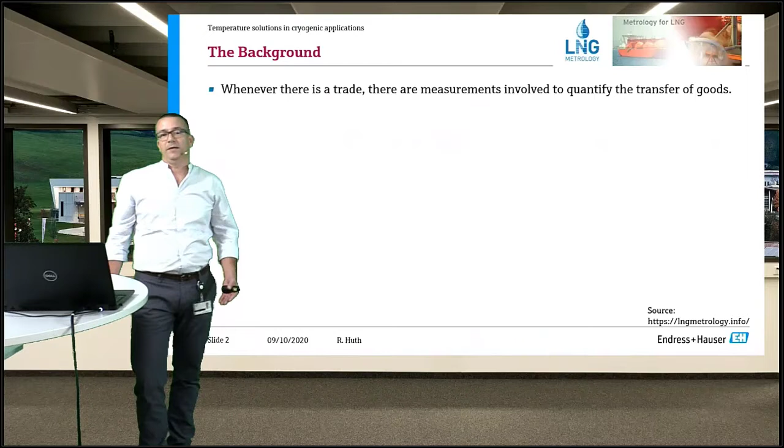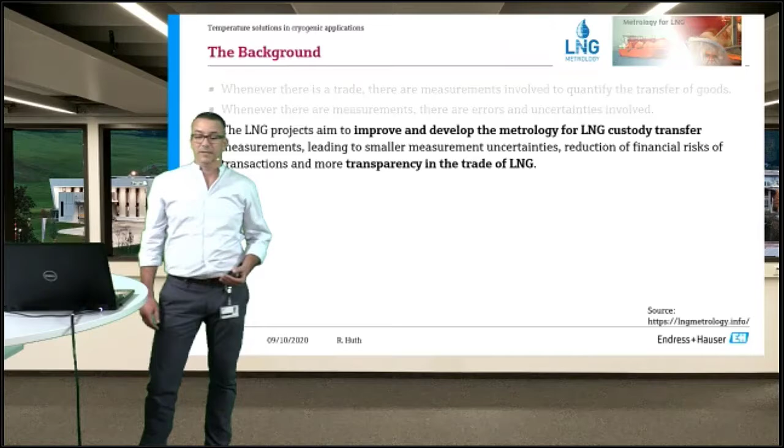Okay, so let's start. Some points about the background. So, whenever there's trade, of course, there's measurement involved to quantify the goods that are transferred. And whenever there's measurement, of course, there are also errors and uncertainties behind that. So there's a LNG projects group that tries to improve and develop metrology for LNG with the aim to reduce the measurement uncertainties and the reduction of financial risks. In the end, make trade of LNG more transparent.

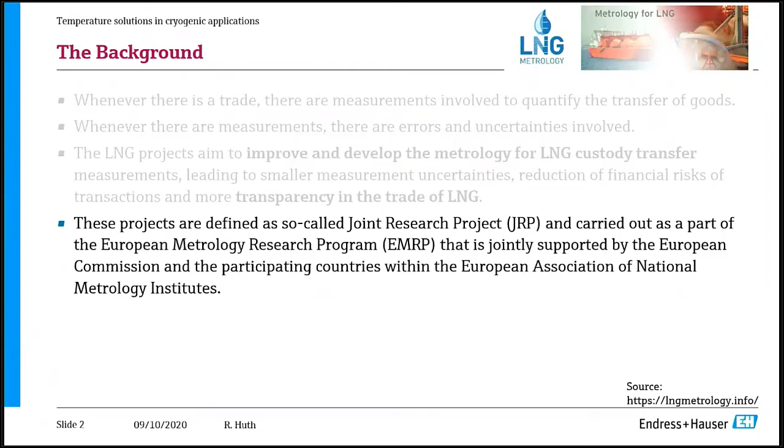These projects are a joint research group carried out as part of the European Metrology Research Program, and it's supported by the European Union and also by the countries and the European Association of National Metrology Institutes.

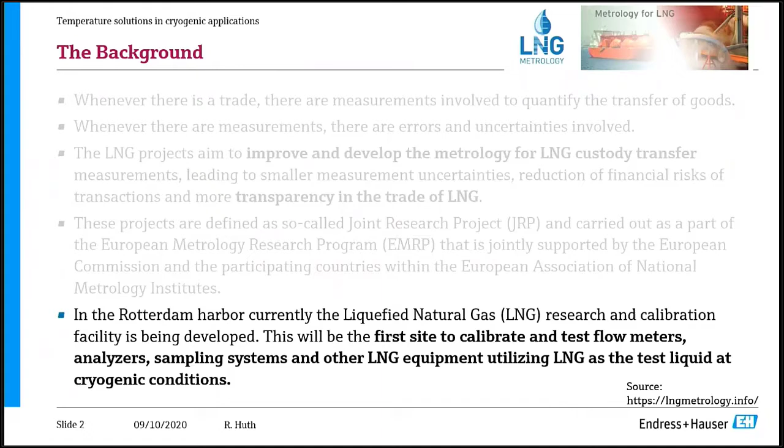Under the frame of these projects in Rotterdam harbor, there has been built a liquefied natural gas research and calibration facility. This is the first site that will be able to calibrate and test flow meters, analyzers, sampling systems, and other LNG equipment utilizing LNG as the liquid during the test. So quite a good and important project.

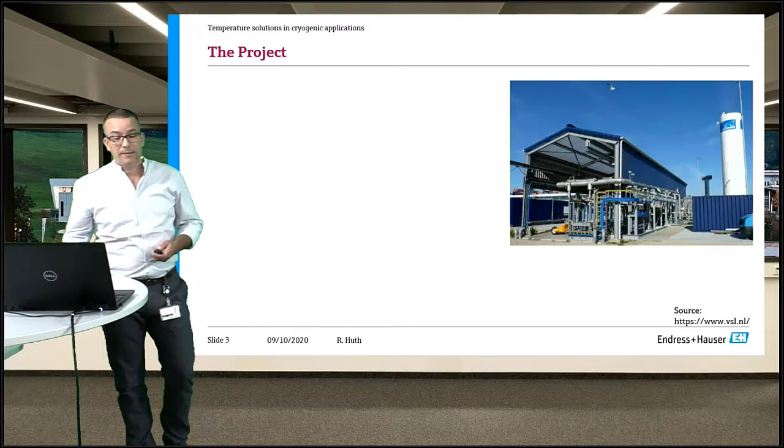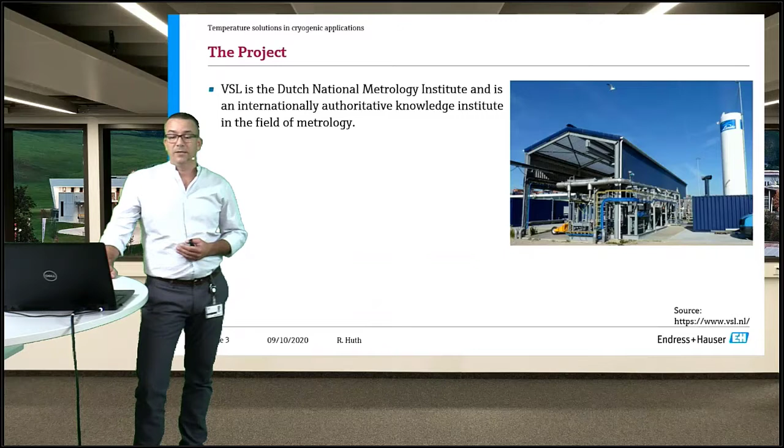So if we are now talking about this project, this calibration facility has been built by VSL. It's the Dutch National Metrology Institute and an internationally known knowledge institute in the field of metrology. The institute has built the most accurate calibration plant for flow meters operating in LNG in the world.

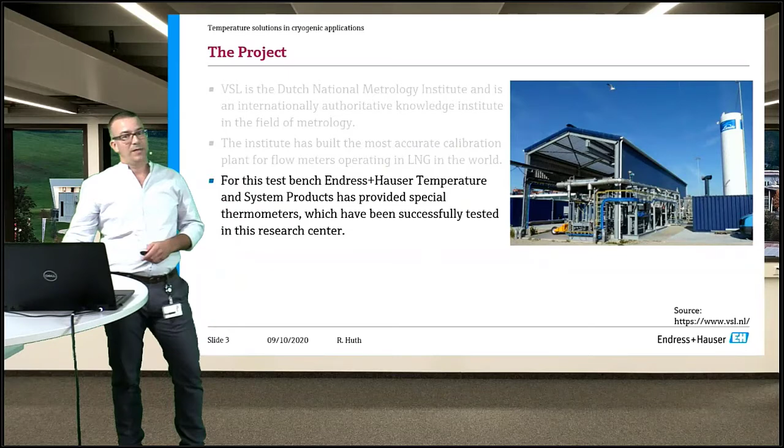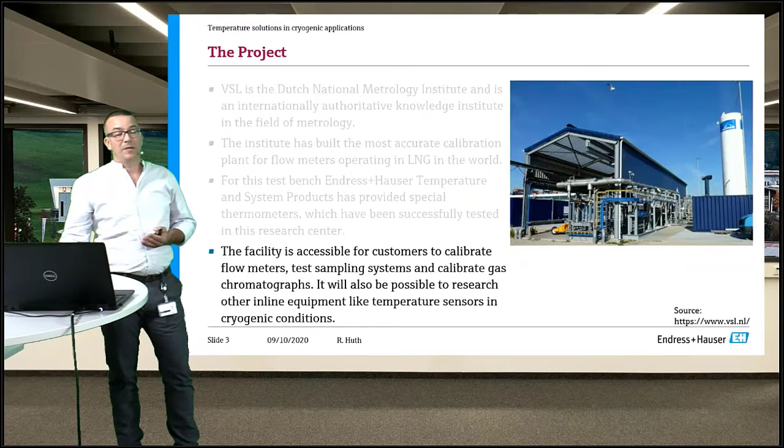And Endress+Hauser has gotten the possibility to install our temperature sensors there. These temperature sensors have been developed together with VSL, especially for this project, for this application, and have also been qualified and tested inside of this plant. This facility will be accessible for customers to calibrate flow meters, test sampling systems, and calibrate gas chromatographs. Also, temperature sensors might be calibrated and tested in there.

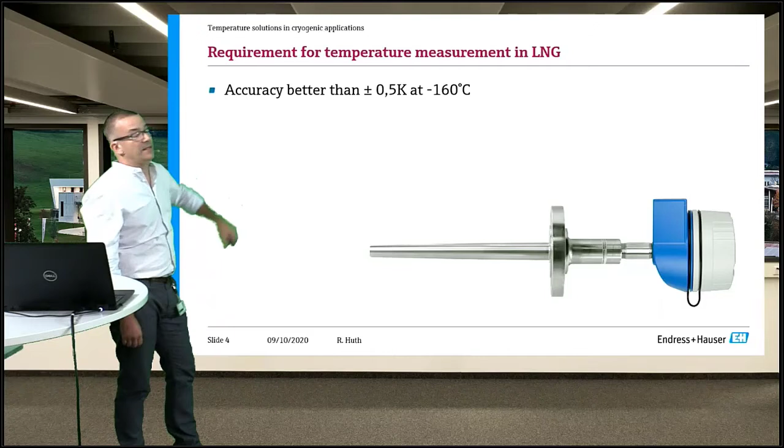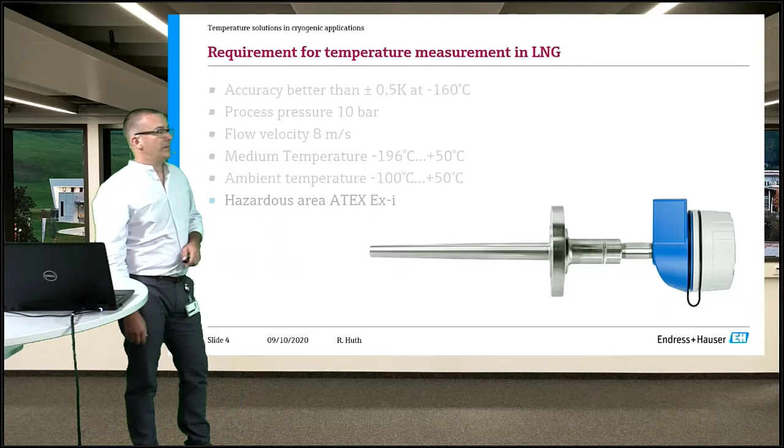So what are the requirements for temperature measurement in LNG? Accuracy better than plus minus 0.5 Kelvin at minus 160 degrees. Process pressure 10 bar, a fluid velocity of 8 meters per second, medium temperature minus 196 because the complete plant was qualified and also calibrated with liquid nitrogen. And the ambient temperature minus 100 up to 50 degrees, and the complete assembly is in an ATEX Ex area.

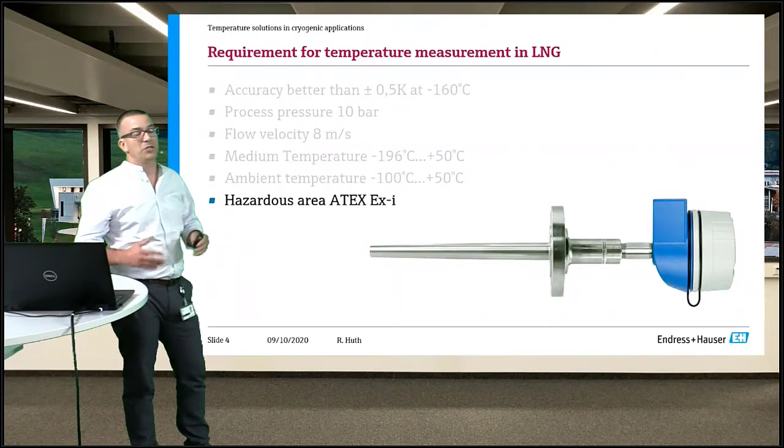So from the beginning, that doesn't look too critical for temperature measurement. But what do you think? What are the major difficulties for temperature measurement in LNG applications? So please use Menti, type in some words. What do you think are the major difficulties for temperature measurement in LNG? Any idea?

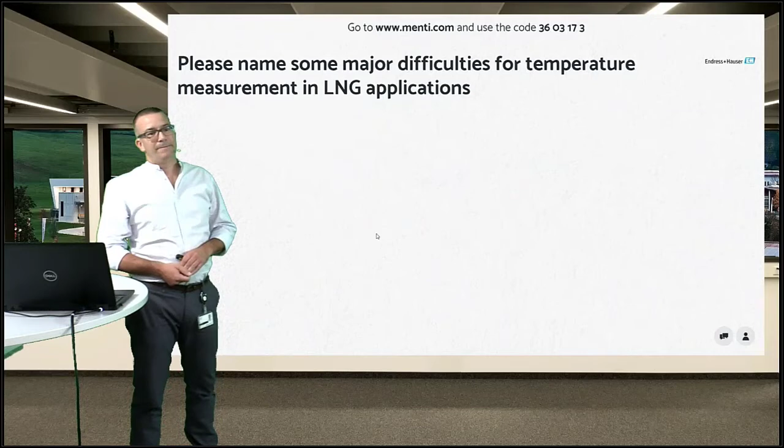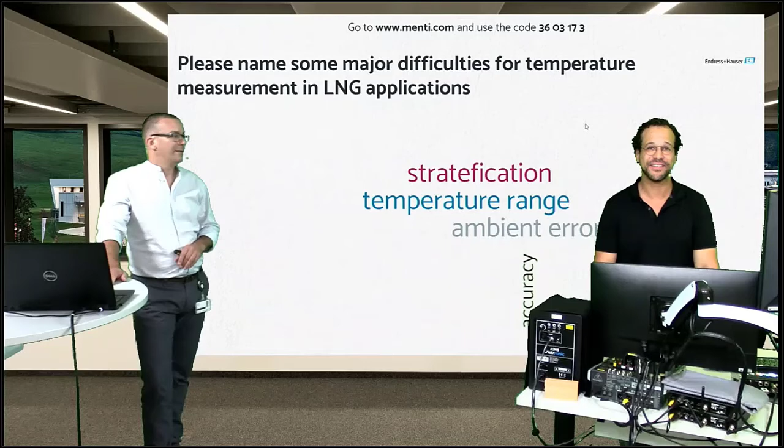We need you again. No time to watch YouTube videos. Right here is the place to be. And we get the first result. So Robert, you can quite directly tell us something about what you think about it.

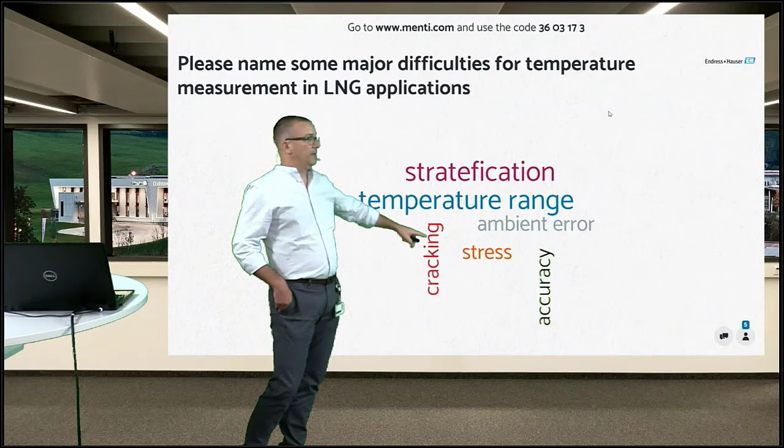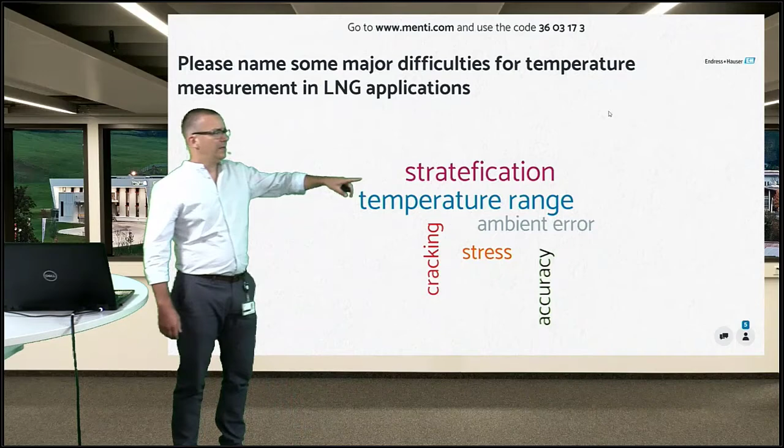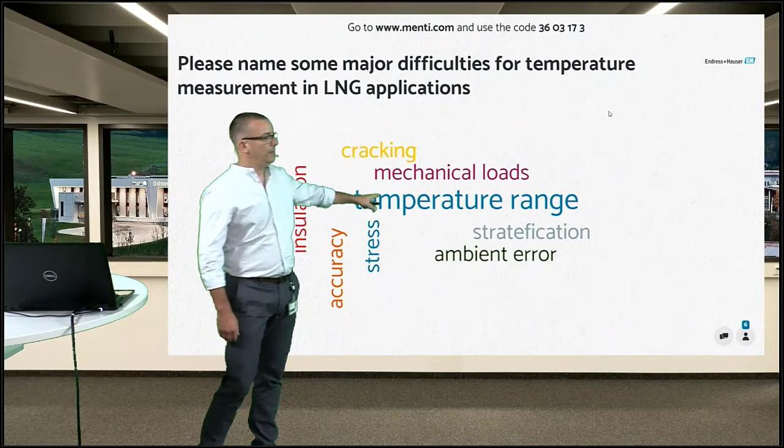Yeah, okay. We see accuracy here. Yes, definitely. We'll come to that point later. Ambient error as well. Temperature range. Yes, of course. Stress, I think it's thermal and it's mechanical stress. Absolutely true. Cracking. I'm not sure if that's the mechanical stress. Not sure about that. Stratification. I don't know what that means, I'm sorry. Mechanical loads, yes. Insulation, absolutely. Okay, then I think we have all that. Most of them are right. Absolutely. So let's have a deeper look at the requirements.

So we said accuracy better than plus minus 0.5 Kelvin. What do we have to think about? At the first step, it's the accuracy of the sensor element itself. Then it should be an exchangeable sensor for recalibration to see if it's still okay. If we want to have a high accuracy, of course, we should think about digital communication. And for this high accuracy, we should also think about sensor transmitter matching, so modifying the transmitter in a way that the optimum result comes out of the sensor.

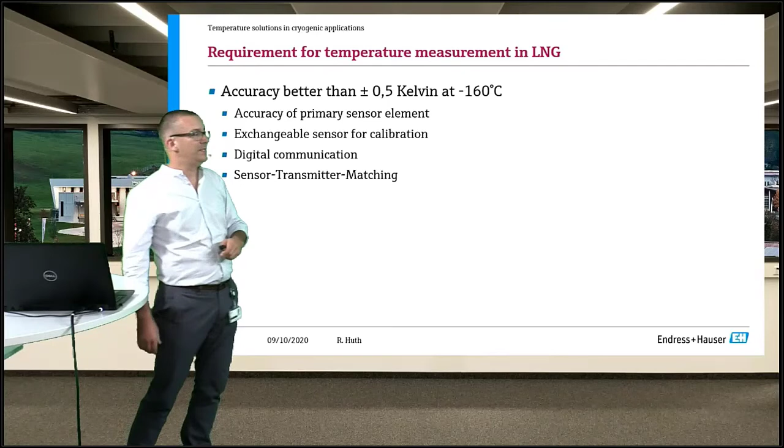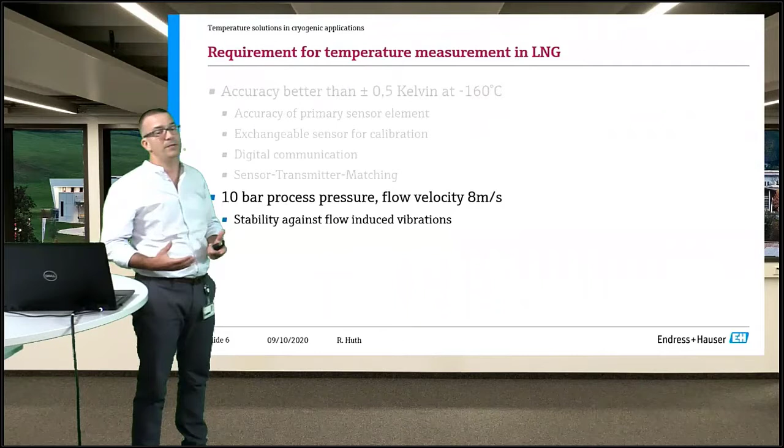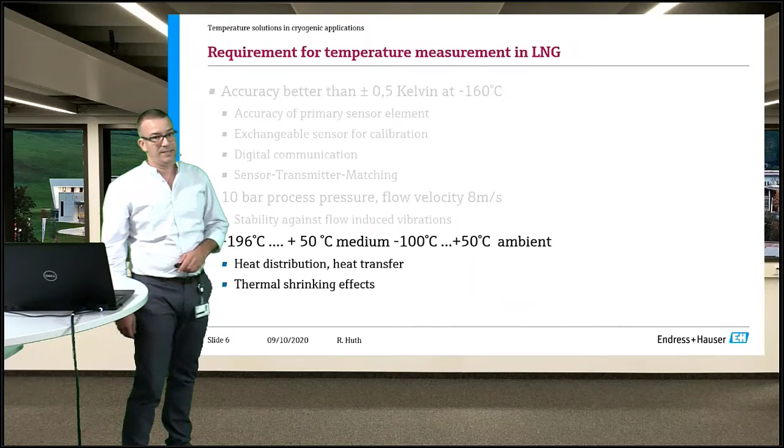10 bar process pressure and a flow velocity of 8 meters per second. Of course, for these conditions, we have to think about the stability against flow-induced vibrations. And with a temperature range from minus 196 to plus 50 in the ambient, of course, we also have to think about heat distribution, heat transfer, and also thermal shrinking effects. So how do we do that? With these points, we started the development together with the colleagues in VSL.

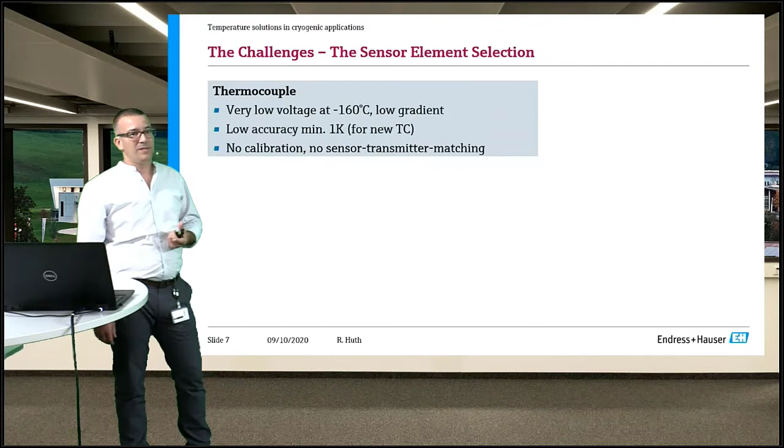If you think about the sensor element, so the selection of the primary sensor, we could think about a thermocouple, but at minus 160 degrees, they have a very low voltage and a low gradient, so it's hard to measure or to transfer the right temperature. Then thermocouples have a low accuracy, minimum plus minus 1 Kelvin, and that's only valid for new thermocouples. And also a bad effect: with thermocouples, you are not really able to calibrate them and to check if they are okay or not. So that doesn't work. And sensor transmitter matching is also not possible with thermocouples. Then if you think about the standard RTDs according to the IEC, for this temperature range at minus 160 degrees, only class B is available.

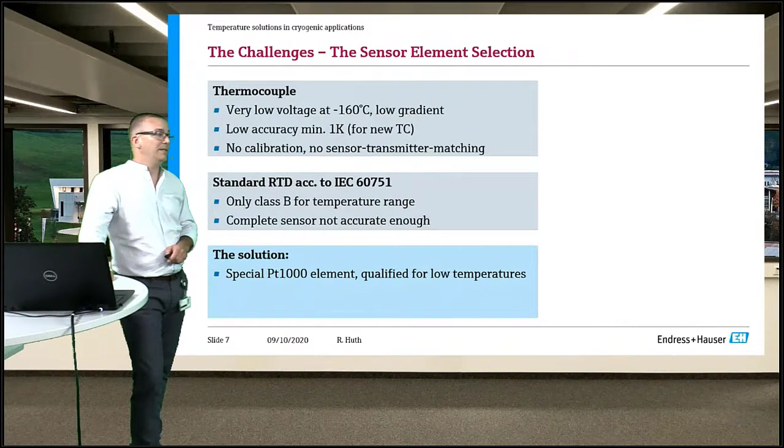Class B in this temperature range means an accuracy of plus minus 1.1 Kelvin. And if we also think about the ambient temperature and the heat transfer, the complete sensor would not be accurate enough. So our solution was a special PT1000 element. It was qualified for the low temperatures.

We have special thermal characteristics of this sensor, and we had to put this special characteristic into one of our transmitters. The TMT162 is able to work with individual characteristics of the sensors, and with this solution we were able to achieve the highest accuracy for the minus 160 degree.

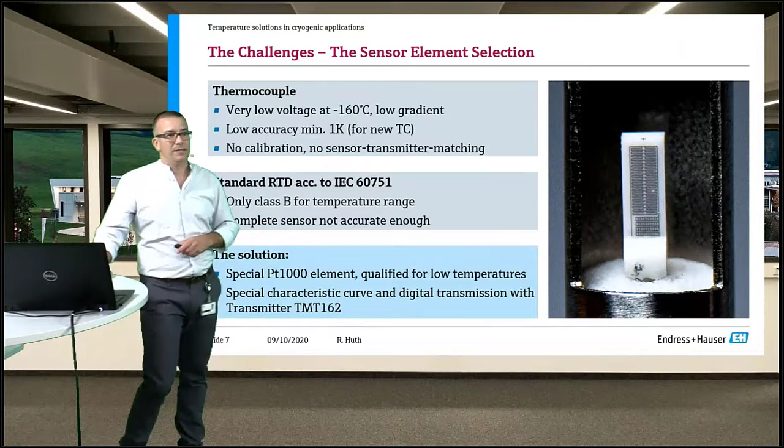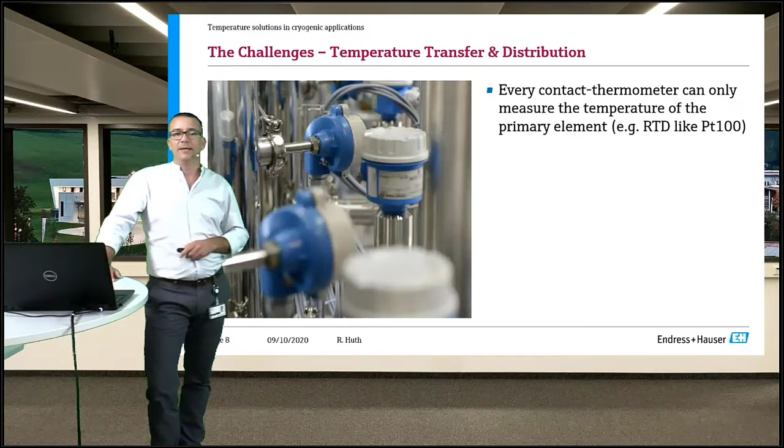Well, the second challenge is the temperature transfer and distribution. So every contact thermometer is only able to measure its own temperature, so the temperature of the sensor element, like the PT100 or here the PT1000. So knowing this, we have to develop a thermometer that is able to transfer the heat from the process medium through the thermowell to this sensor element. Of course, if the temperature sensor is able to transfer heat, it's also influenced by the ambient temperatures.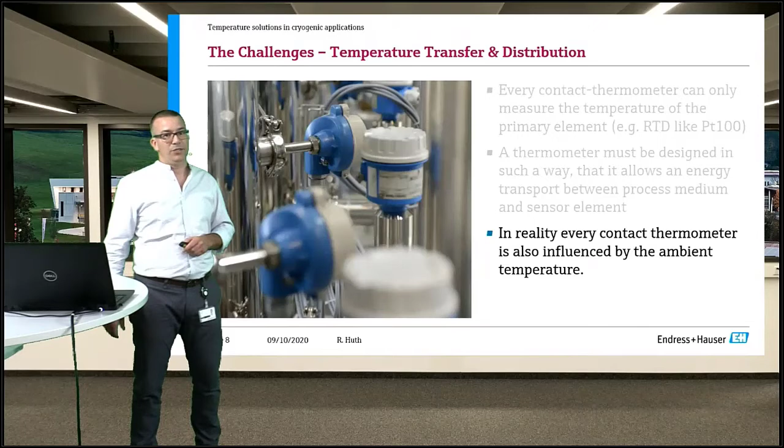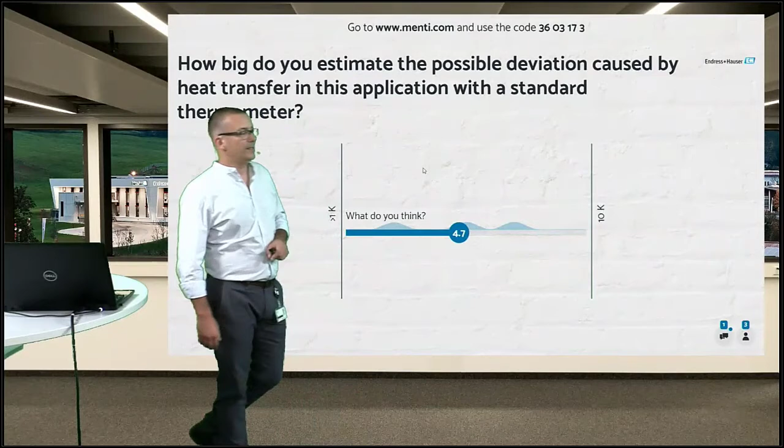So with the standard sensor, like we saw it some pictures ago, what do you think? Which is the estimated or possible deviation caused by heat transfer in this temperature range? So between minus 160 and 20 degree ambient temperature, what do you think is the failure that we get purely by heat transfer in this temperature sensor? You have here a range, from about 1K up to 10K. So what do you think is the failure that we get in there?

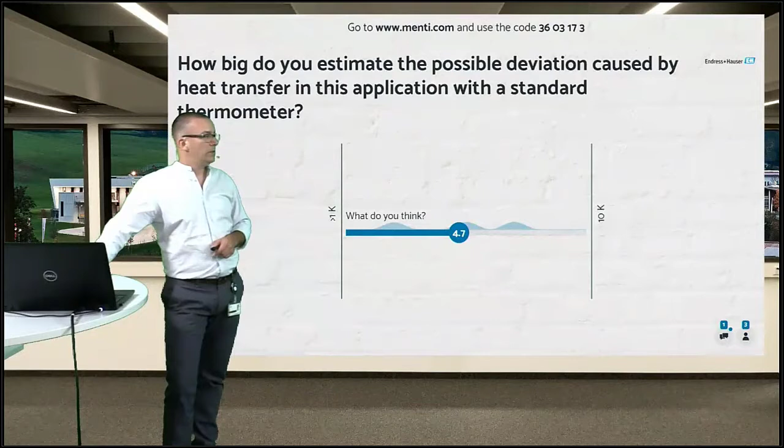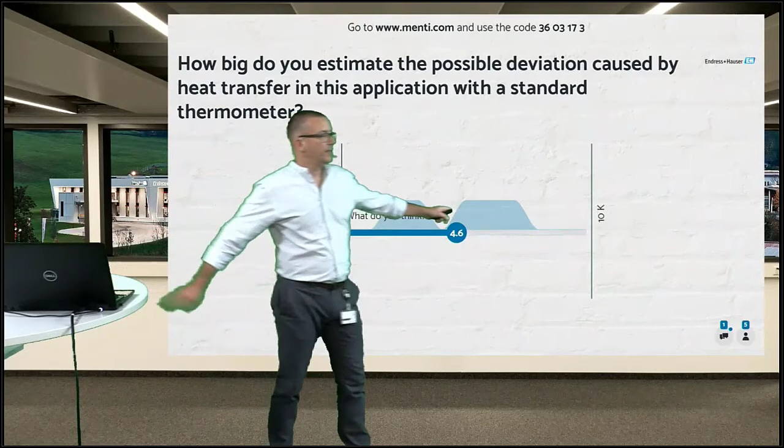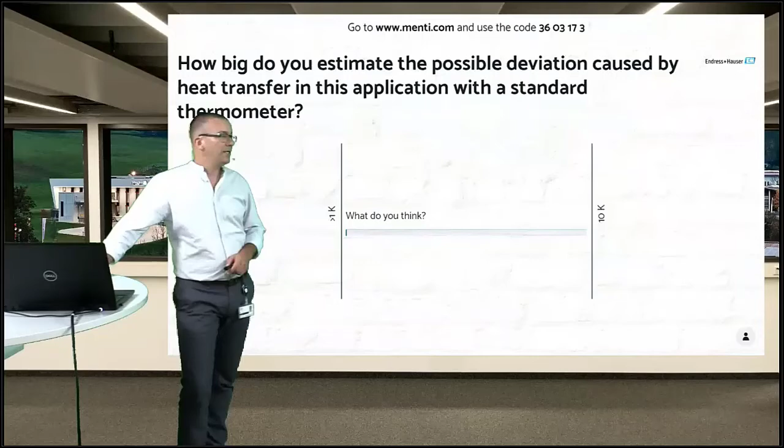Okay, we've got 3 answers, maybe. Are there some more people that want to answer? At the moment, we are at 4.7 degree failure. Some of you think it's quite small, so about 2 Kelvin, and the others think it's between 5 and 7 Kelvin, maybe. Okay, 4.6 Kelvin. Not too bad, this estimation. We made some calculations, some simulations, and also some tests, and we came up with a deviation of about 5 to 7 Kelvin in the end for a standard sensor.

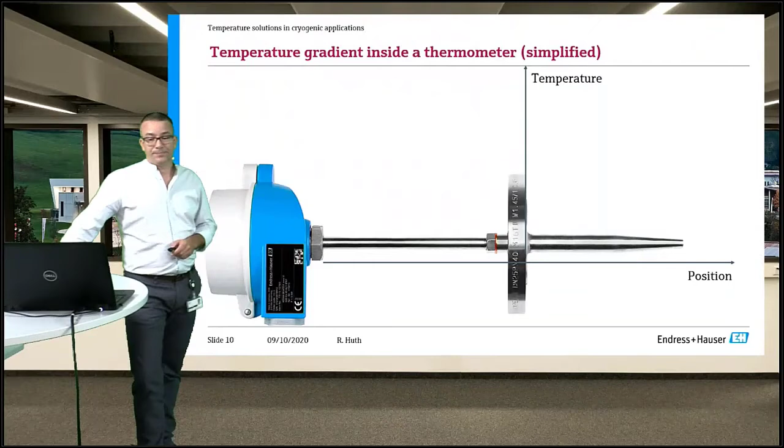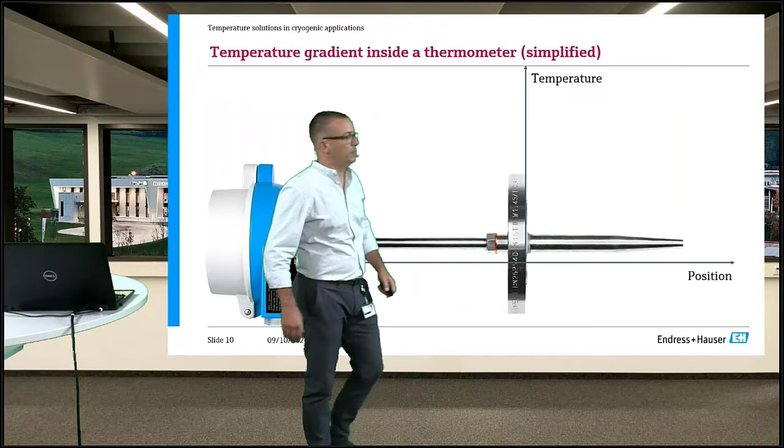So why is that? If you now look to a standard temperature assembly like this one, we have a head, we've got the neck tube, we've got a process connection here, a flange, and a bar stock thermowell. So we've got 2 different temperatures. We have the ambient temperature, which is in our case higher than the process temperature at the tip of the thermowell. And we will get this temperature distribution.

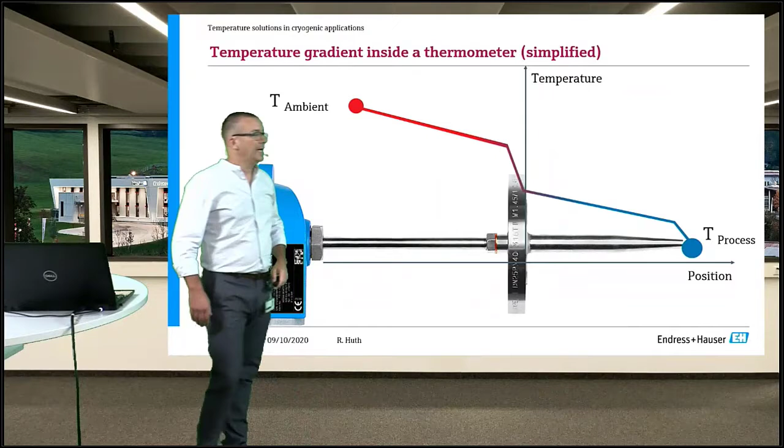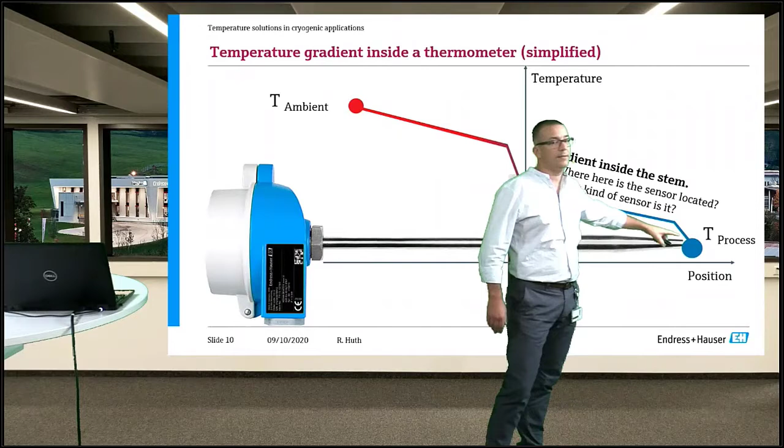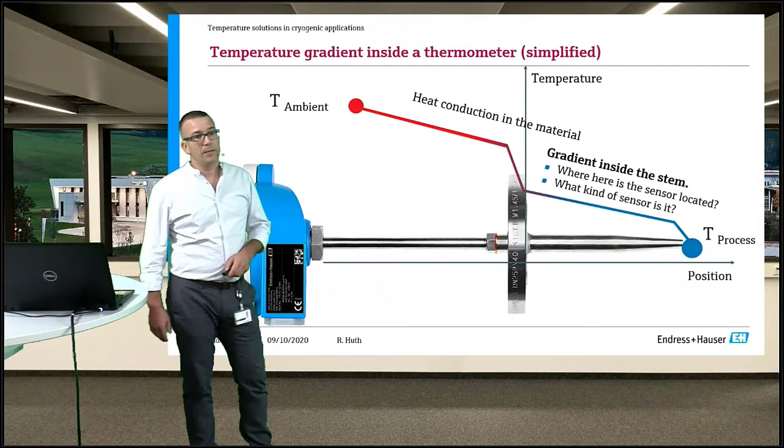So we have a gradient inside of the thermowell stem, and depending on where the sensor is located, we either are able to measure the process temperature or we already measure a higher temperature. So the sensor element has to be placed as deeply inside of the thermowell as possible. And then we've got heat conduction in the material of the thermowell and of the neck. And outside we've got some convection if we do not have an isolation, and all these factors have influence on the temperature that we are measuring.

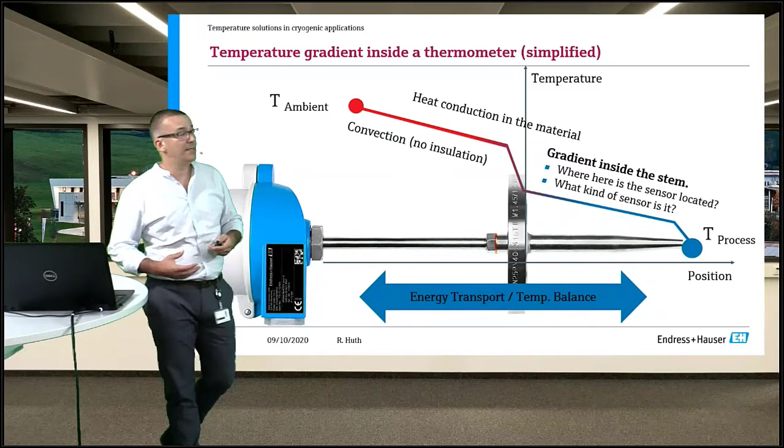So inside of the thermometer, we've got an energy transport. If here the temperature is higher, of course the transport is into this direction, and this is also leading to a temperature balance from the outside to the inside. So we are also able to heat the LNG inside the process if we have high temperatures outside. So how are we able to solve this issue?

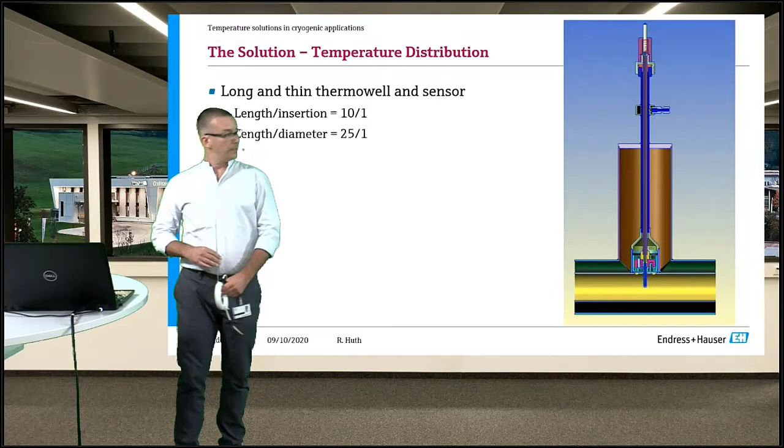So the solution for the temperature distribution is a long and thin thermowell sensor. So this is the thermowell we have. It's about 500 millimeters long, and the insertion part of the thermowell is only this 50 millimeters. And we also use a very, very thin, so a 3 millimeter insert for our measurement. So you don't really see it. Here, can you see it now? No, it doesn't work. It's too thin, sorry.

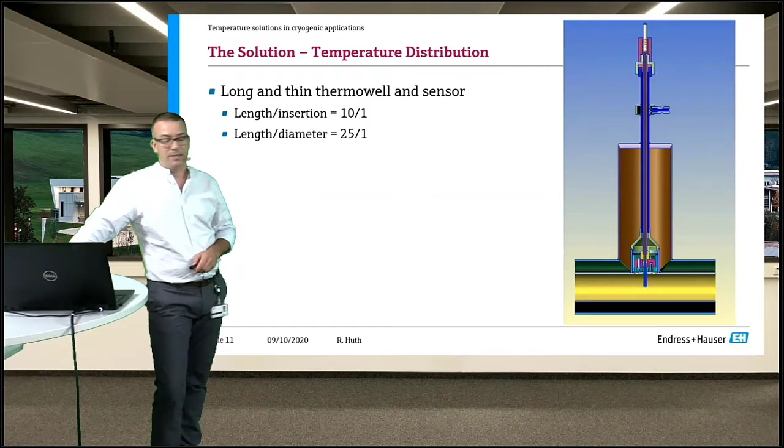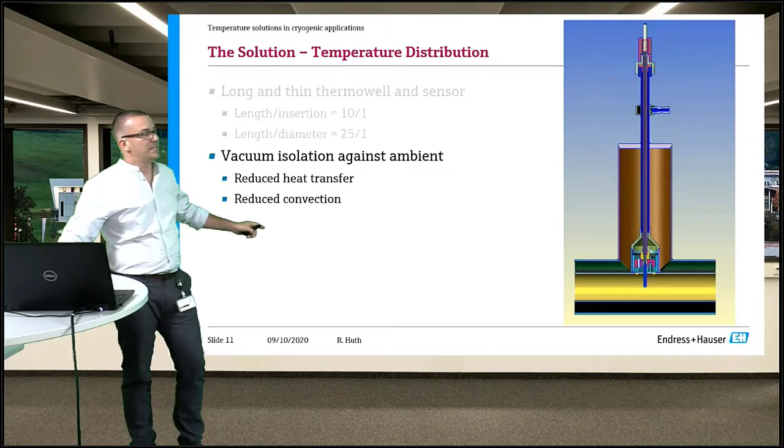So the ratio length to insertion is about 10:1, and the length to diameter ratio is 25:1. So with this long length, we have the possibility to reduce the heat transfer from the outside to the inside. Next step is the vacuum isolation. So the complete sensor is installed into a vacuum isolated tube. So the blue part and also the brown part is vacuum isolated, whereas the LNG is in the yellow part.

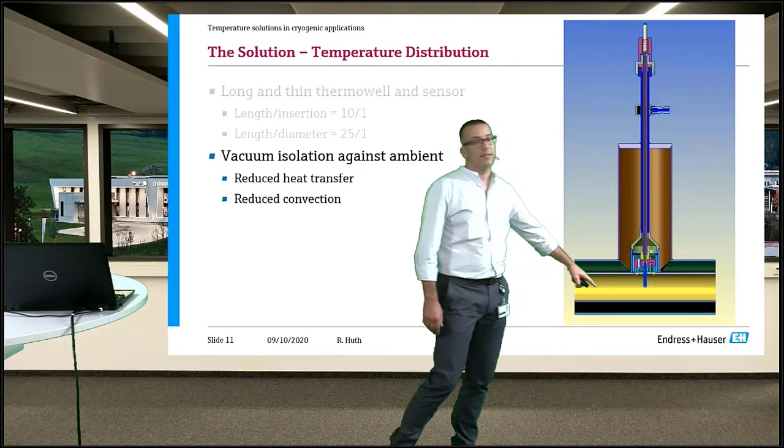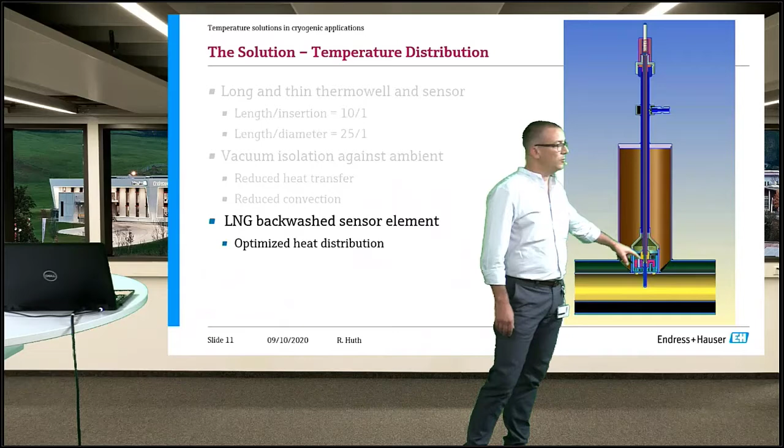And we have an LNG backwashed sensor element to optimize the heat distribution. So in this area, we've got also LNG inside of the cap, so that also behind the sensor we have lower temperatures and optimize the measurement with this.

Then we are talking about mechanical strength and thermal expansion. So if you put a cylindrical structure like a thermowell into an external flow, a regular pattern of vortices will form, and that's called the von Karman street. So depending on the natural frequency of the thermowell and on the shedding frequency of the flow, the cylinder or the thermowell will start to vibrate and oscillate.

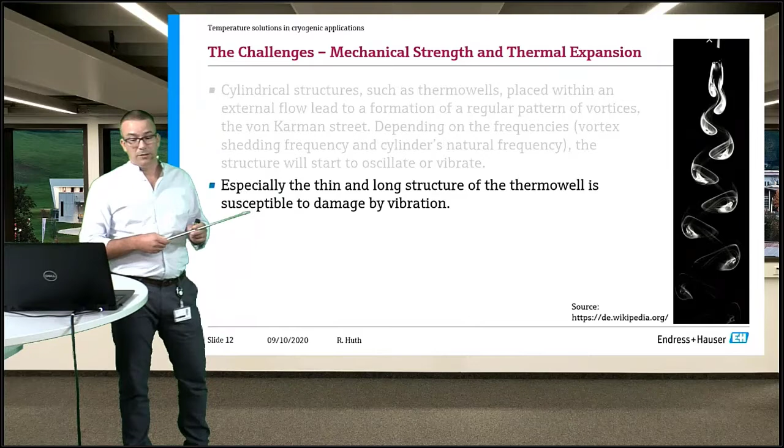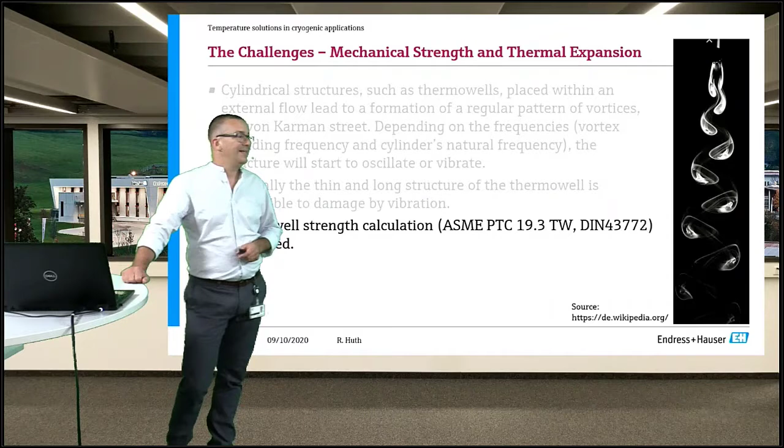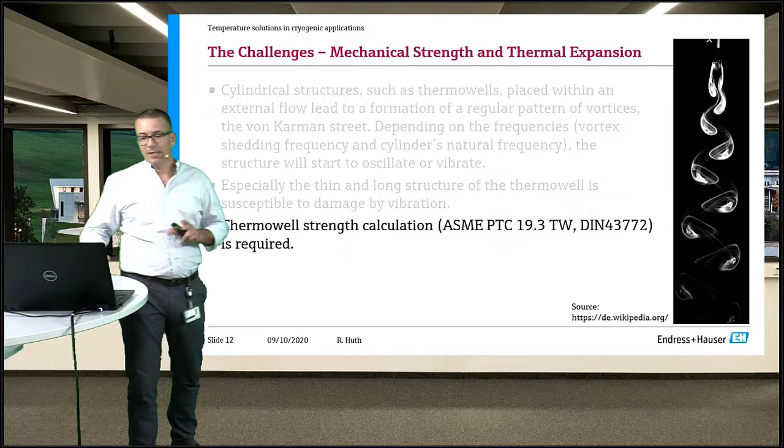Especially the thin and long structure of our thermowell that we have here is very susceptible to damage by vibration. And on the other hand, to know about the stresses on our thermowell, a thermowell calculation according to ASME PTC 19.3 or DIN 43772 should be made. So the thermowell, of course, does not follow the ASME regulations, so it's not possible to follow the rules one-to-one, but it's possible with the DIN calculations.

And on the other hand, of course, the thermowell will show a thermal shrinking effect. So if we install it at plus 20 degrees and then we cool it down to minus 160 degrees, of course, it will get shorter, and we should not prevent this movement. Otherwise, we get additional stresses on the thermowell.

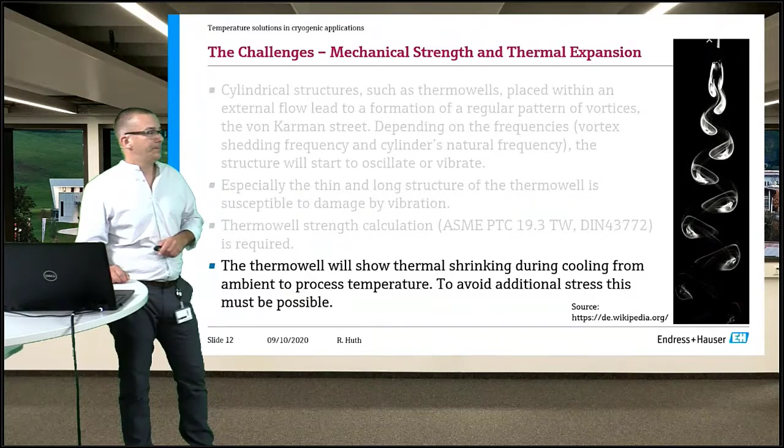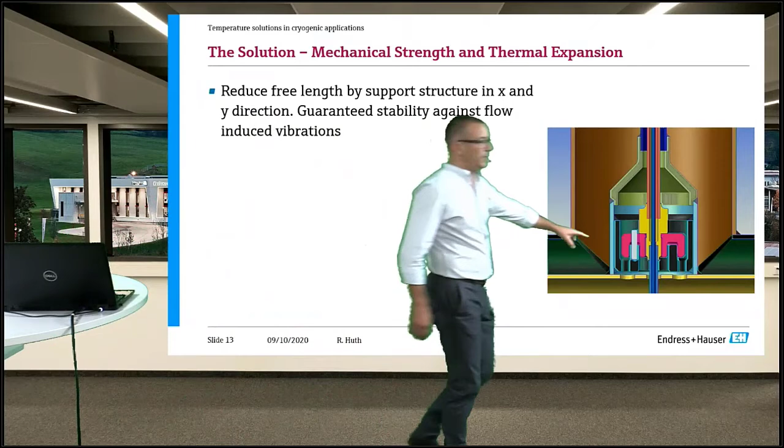So what do we do? We reduce the free swinging length by a support structure. You can see the support structure in here. So it's above the thermowell, above the insertion length. So the movement in X and Y direction is minimized, and we are able to guarantee the stability against the flow-induced vibrations.

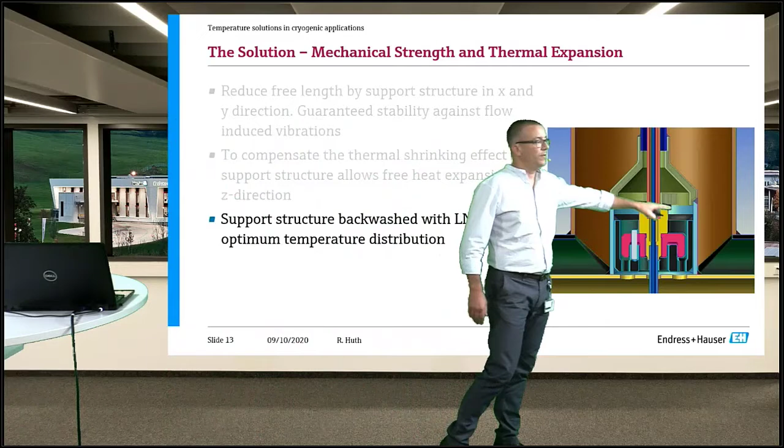To compensate the thermal shrinking effect, the support structure allows free heat expansion. So movement in Z direction is still possible. And as I already said, the support structure is backwashed with LNG to have also cooling effects on the backside of this complete support structure.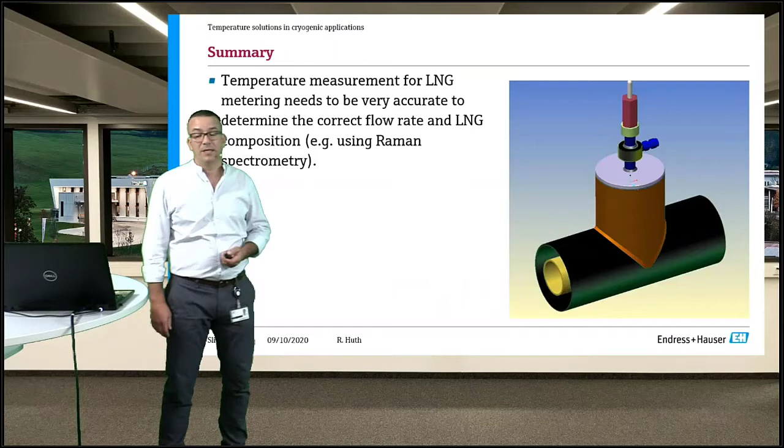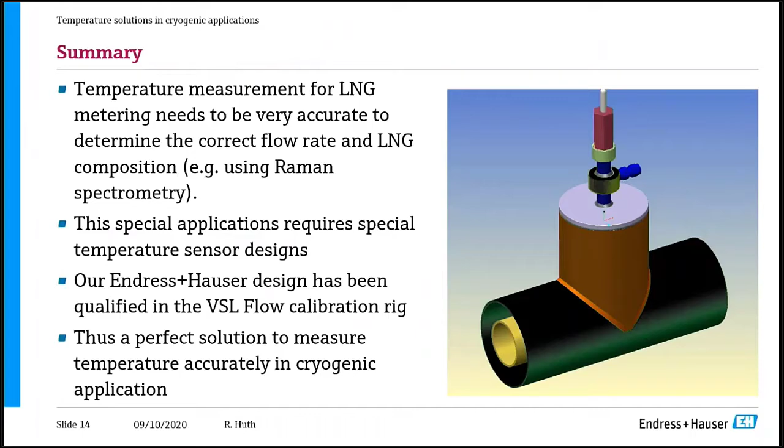Okay, so as a summary, temperature measurement in LNG metering needs to be accurate to determine the correct flow rate and also LNG compositions. These special applications require special temperature sensor designs. The Endress+Hauser design I've just introduced to you has been qualified in the VSL flow calibration rig. And in the end, it's a perfect solution to measure temperature accurately in cryogenic applications.

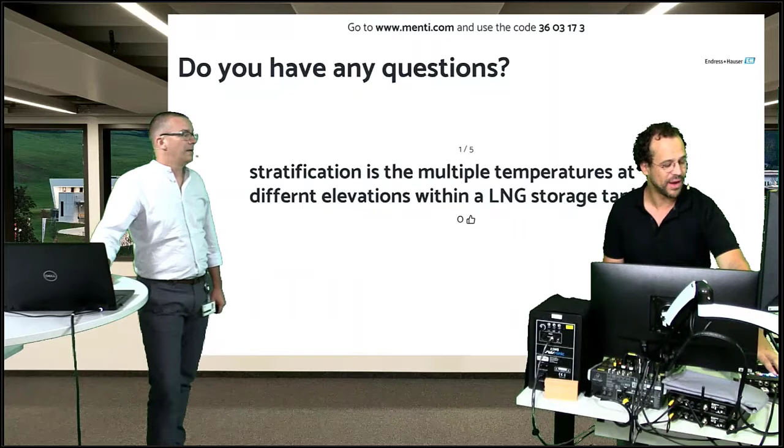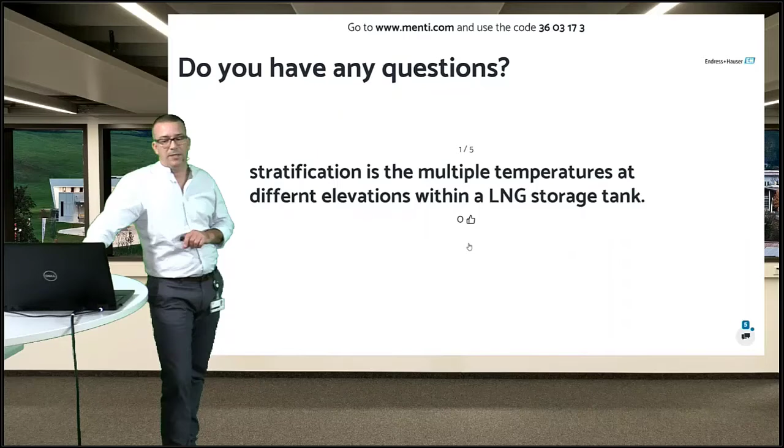So our stratification. Okay, yeah, great. Yes, stratification is the multiple temperatures at different elevations within an LNG storage tank. Yes, okay. Sorry, I did not know this expression, but this measurement is foreseen for pipes, and we do not have these stratifications inside of the pipe. So you have one flow of LNG in there, and of course there might be temperature differences also, but here is a very small pipe, so the temperature distribution should be quite homogeneous.

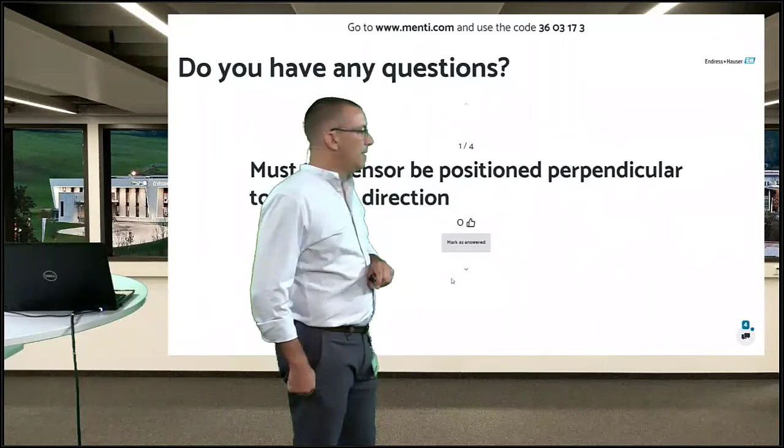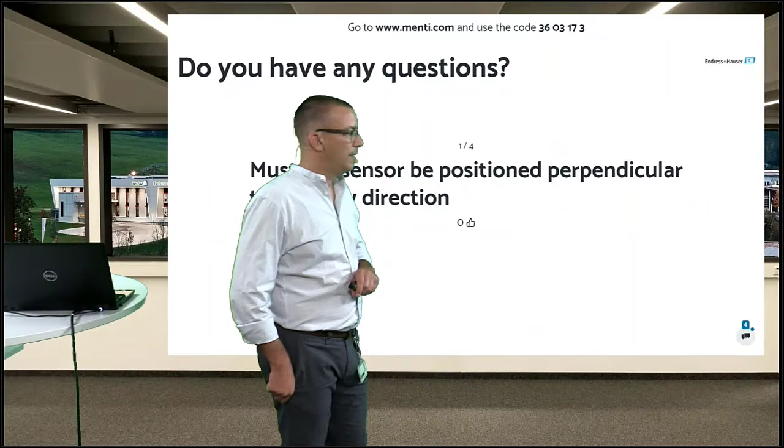But to add something to that, Robert. Yes, of course. We have temperature systems in place also for tank gauging solutions, where we have multiple measuring points in the tank itself to take care of the stratification, because it's a very important topic within the storage facilities. But like you said, not in a pipe.

Yeah, I do not know if the participants were able to hear it, it was very hard for me. But maybe I shortly summarize this thought. So Rob said we are also offering temperature measurement in different elevations of a tank, so that we are able to measure the temperature distribution over the tank, and have also the solutions for storage temperature measurement available.

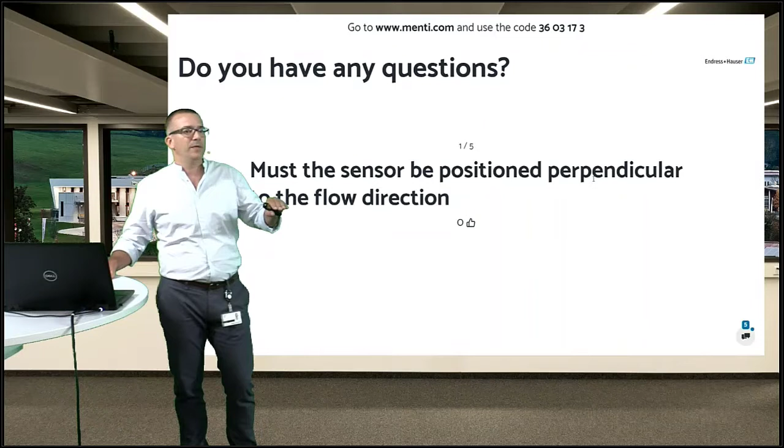So here we had a very small pipe, and the position of the sensors was more or less given. So here this was the best possibility to place the sensor. Of course, if you are able to place a long and thin sensor in this pipe, in the flow, you are also able to get very good measurement results.

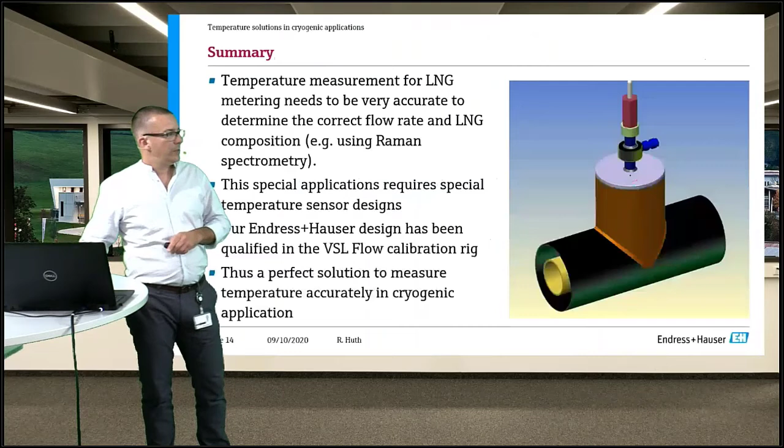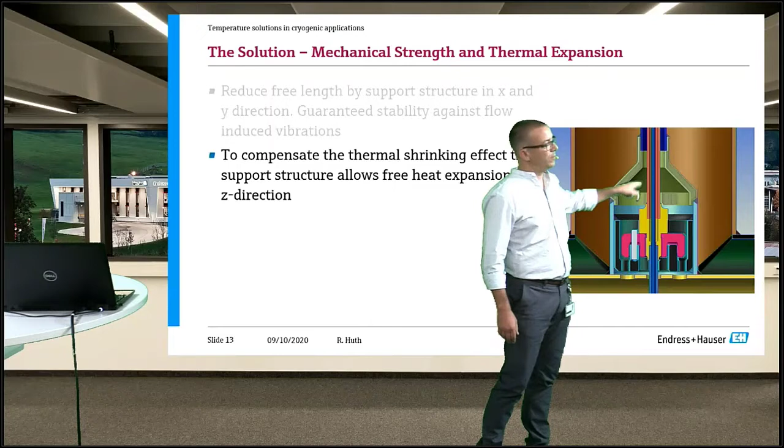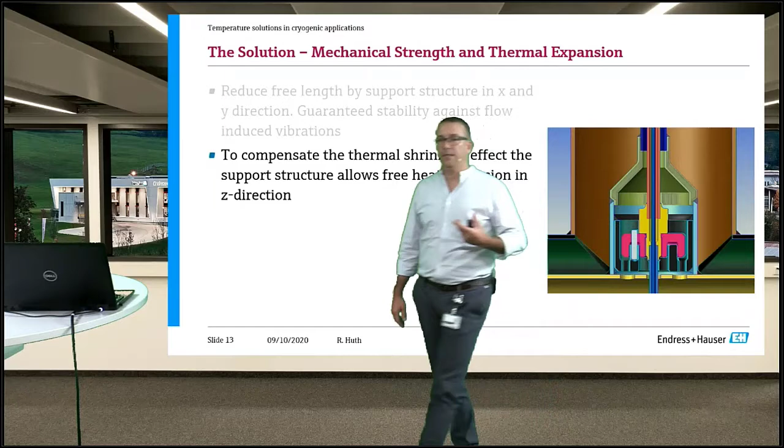What do I mean by LNG backwash? Maybe we go back to, yes, this slide. So the yellow pipe is the pipe of the LNG, and we've got some drillings in here so that the LNG can also flow through this cap part of the thermowell, so that we have a cooling effect also from the backside of the sensor, and can achieve a better accuracy of the measurement and have lower heat transfer from the ambient to the sensor element.

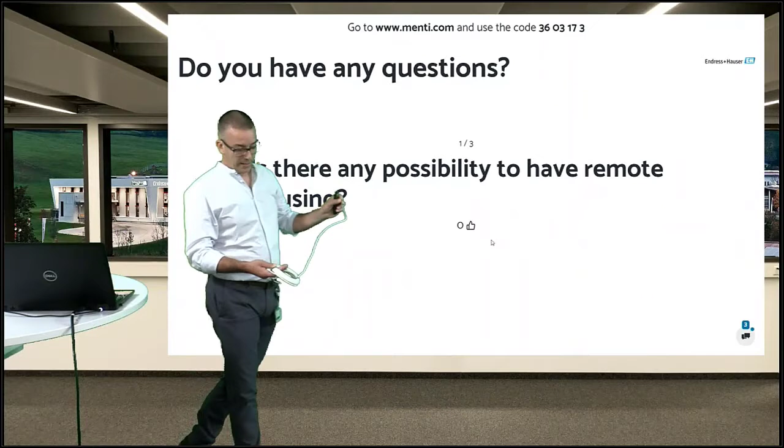Yes, absolutely. There is the possibility to have a remote housing. Also makes sense. What we do, we have this cable sensor. You don't see it that well. But also we are using a remote housing here. So a remote field transmitter TMT162, sorry. And it absolutely makes sense to get the electronics out of the area with the low temperatures, with icing effects, and so on. So we are able to install that also in remote position.

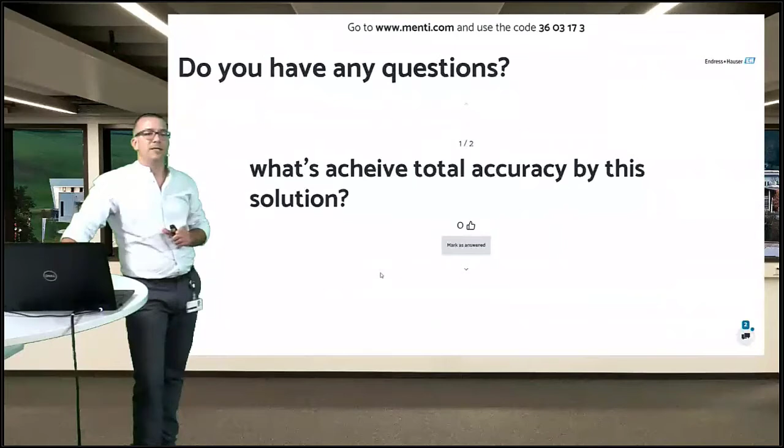The total accuracy of the temperature measurement is plus minus 0.5 Kelvin, which is for the application very good. But you also see that we have to take a lot of measures and have a very special sensor to achieve this accuracy.

Recalibration frequency and model of the temperature sensor I showed. So the model of the temperature sensor, it's a PT1000 element. It's a thin film sensor. We have an MgO tube to generate this insert, and the recalibration frequency, that's a question that the user has to answer. So depending on the conditions of the user, they have to recalibrate the sensor.

From my experience, I would say that with a PT1000 at these low temperatures, the processes of degradation of the PT1000 are very slow, so the recalibration should not be too often, but it's depending on the requirements of the user in the end.